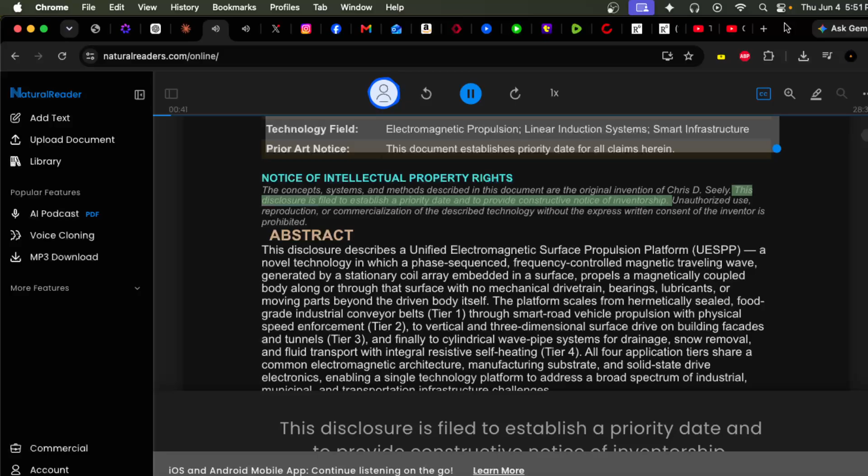Notice of intellectual property rights. The concepts, systems, and methods described in this document are the original invention of Chris D. Seely. This disclosure is filed to establish a priority date and to provide constructive notice of inventorship. Unauthorized use, reproduction, or commercialization of the described technology without the express written consent of the inventor is prohibited.

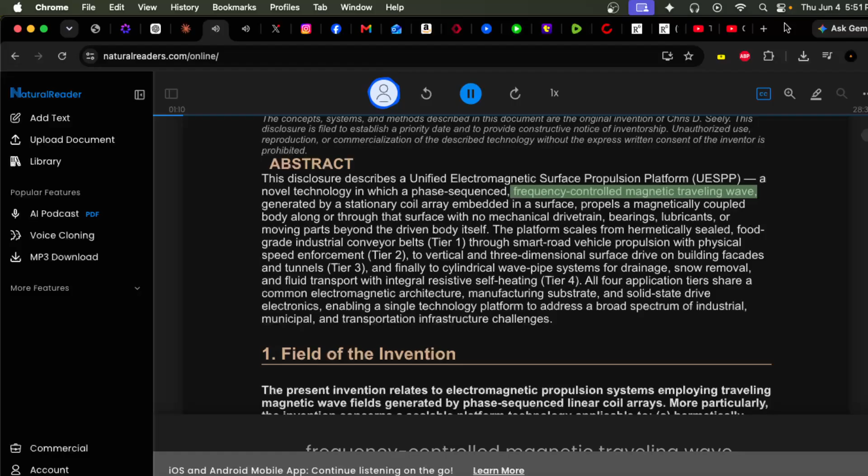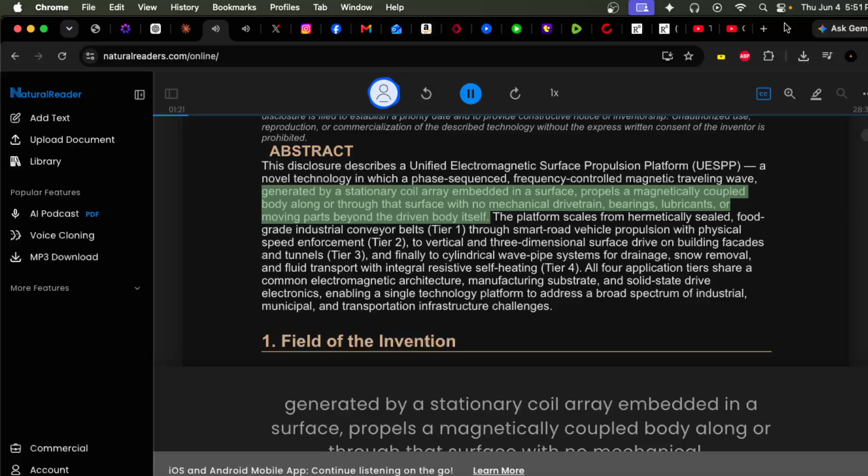Abstract. This disclosure describes a unified electromagnetic surface propulsion platform, a novel technology in which a phase-sequenced, frequency-controlled magnetic traveling wave, generated by a stationary coil array embedded in a surface, propels a magnetically coupled body along or through that surface with no mechanical drivetrain, bearings, lubricants, or moving parts beyond the driven body itself.

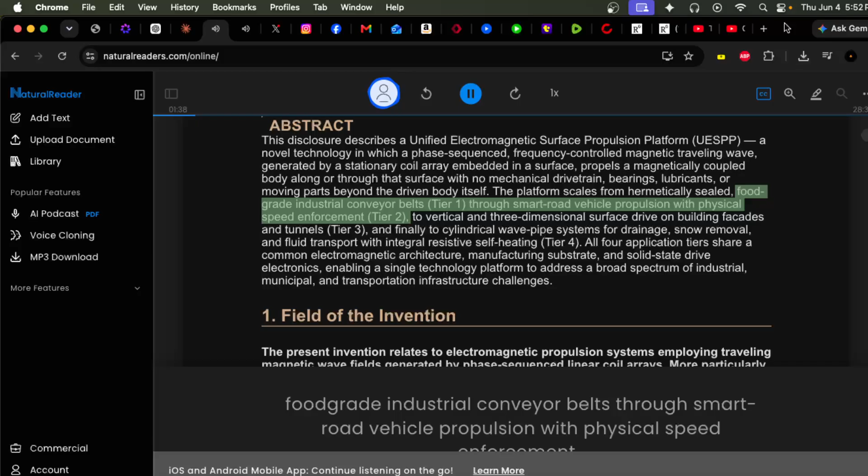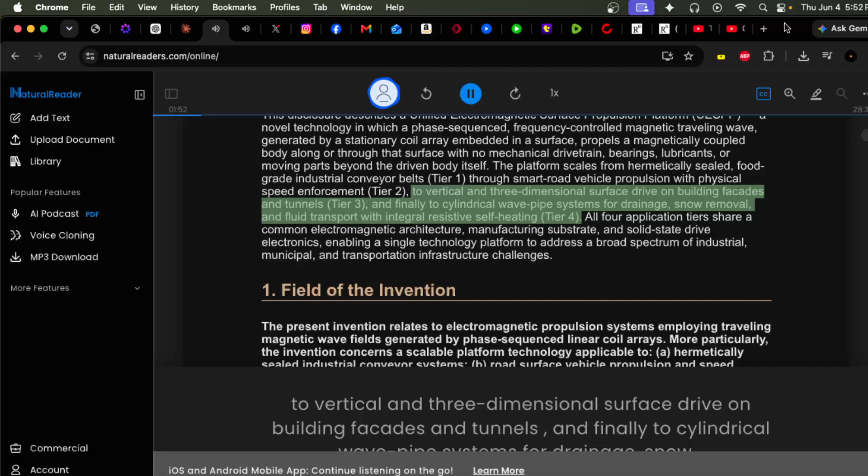The platform scales from hermetically sealed food-grade industrial conveyor belts through smart road vehicle propulsion with physical speed enforcement, to vertical and three-dimensional surface drive on building facades and tunnels, and finally to cylindrical wave pipe systems for drainage, snow removal, and fluid transport with integral resistive self-heating.

All four application tiers share a common electromagnetic architecture, manufacturing substrate, and solid-state drive electronics, enabling a single technology platform to address a broad spectrum of industrial, municipal, and transportation infrastructure challenges. Section 1: Field of the invention.

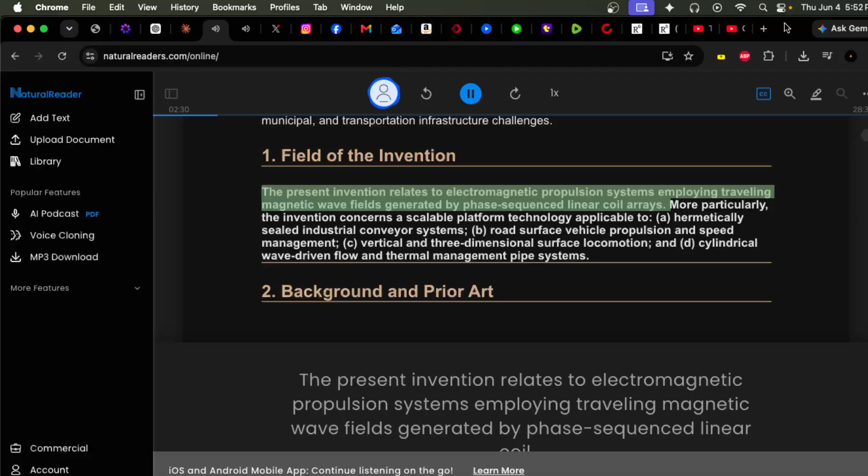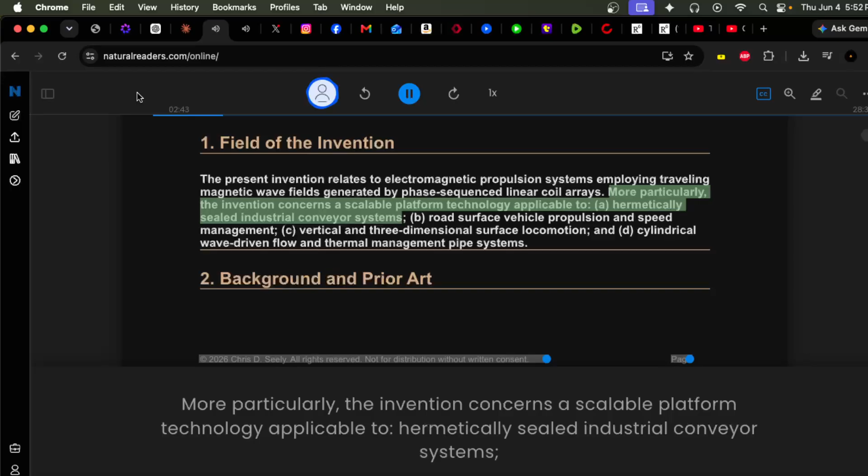The present invention relates to electromagnetic propulsion systems employing traveling magnetic wave fields generated by phase-sequenced linear coil arrays. More particularly, the invention concerns a scalable platform technology applicable to hermetically sealed industrial conveyor systems, road surface vehicle propulsion and speed management, vertical and three-dimensional surface locomotion, and cylindrical wave-driven flow and thermal management pipe systems.

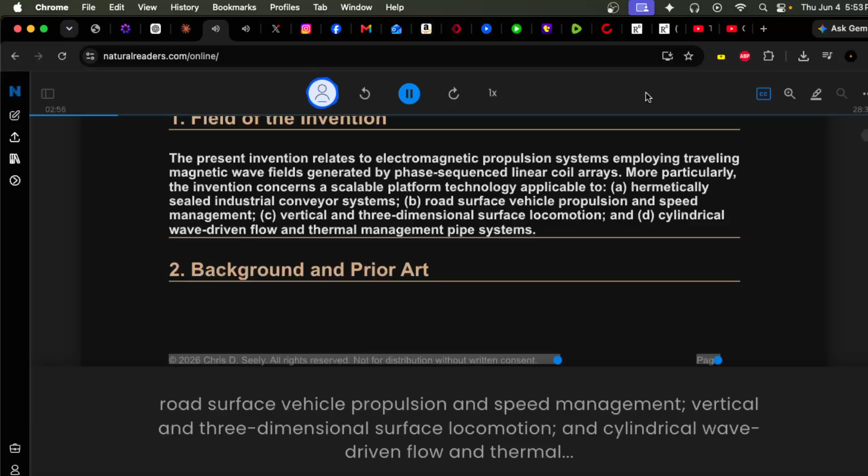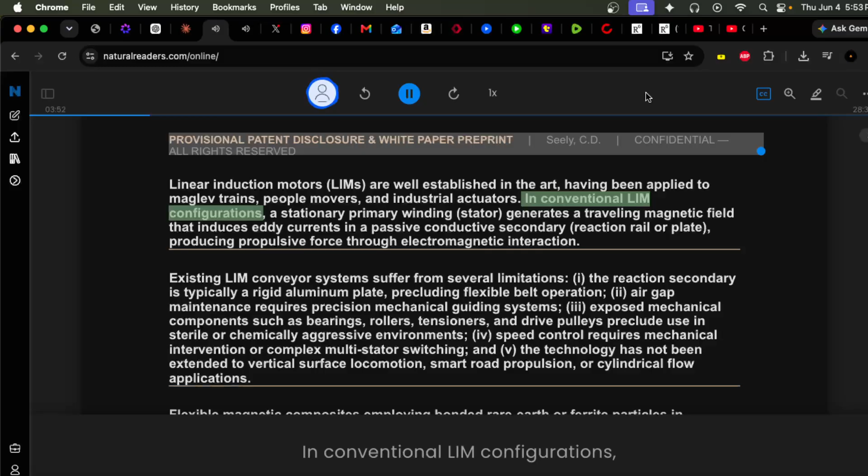Section 2: Background and prior art. Linear induction motors are well established in the art, having been applied to maglev trains, people movers, and industrial actuators. In conventional LIM configurations, a stationary primary winding generates a traveling magnetic field that induces eddy currents in a passive conductive secondary, producing propulsive force through electromagnetic interaction.

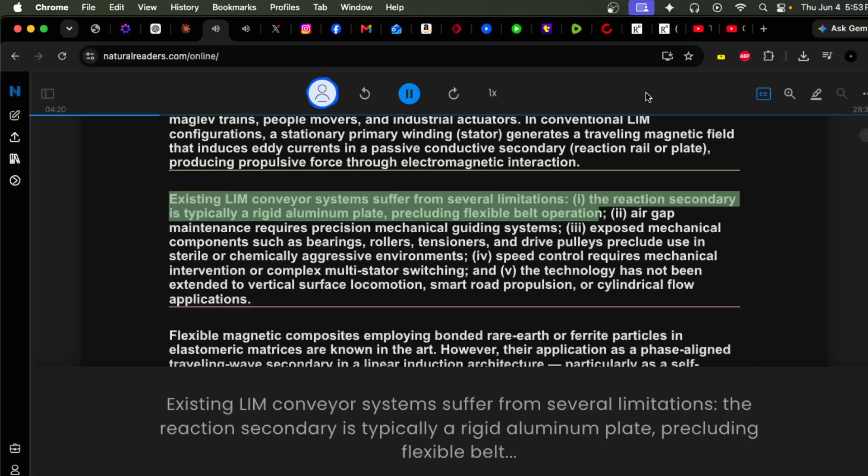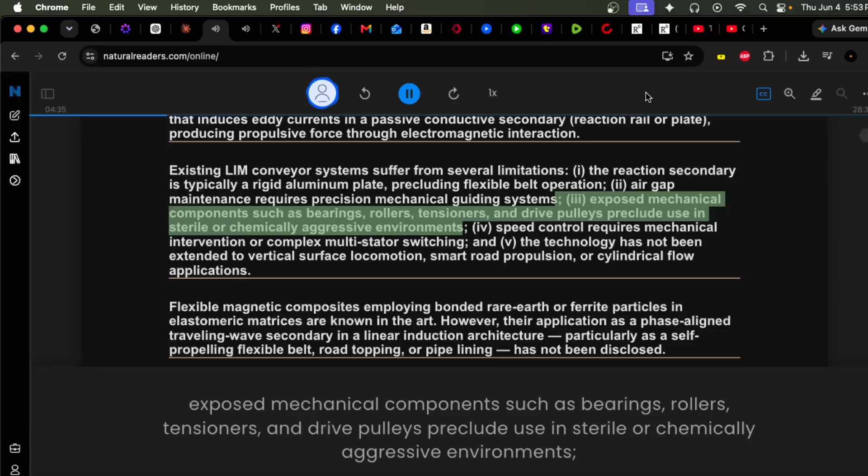Existing LIM conveyor systems suffer from several limitations. The reaction secondary is typically a rigid aluminum plate, precluding flexible belt operation. Air gap maintenance requires precision mechanical guiding systems. Exposed mechanical components such as bearings, rollers, tensioners, and drive pulleys preclude use in sterile or chemically aggressive environments.

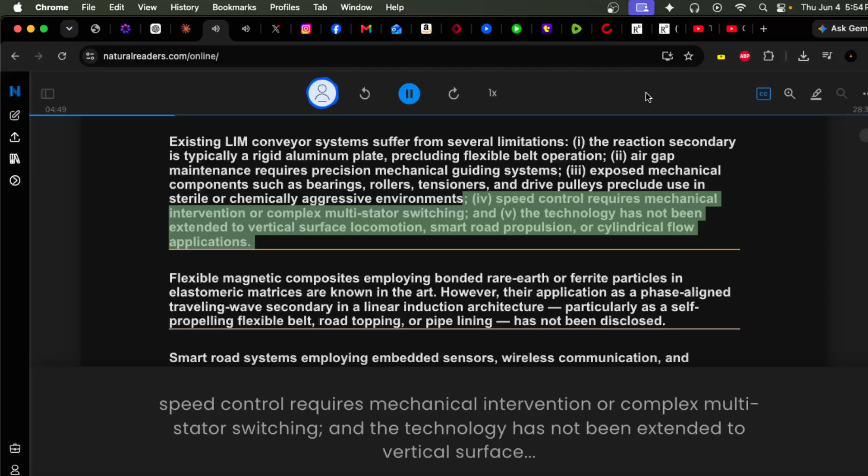Speed control requires mechanical intervention or complex multi-stator switching, and the technology has not been extended to vertical surface locomotion, smart road propulsion, or cylindrical flow applications.

Flexible magnetic composites employing bonded rare earth or ferrite particles in elastomeric matrices are known in the art. However, their application as a phase-aligned traveling wave secondary in a linear induction architecture, particularly as a self-propelling flexible belt, road topping, or pipe lining, has not been disclosed.

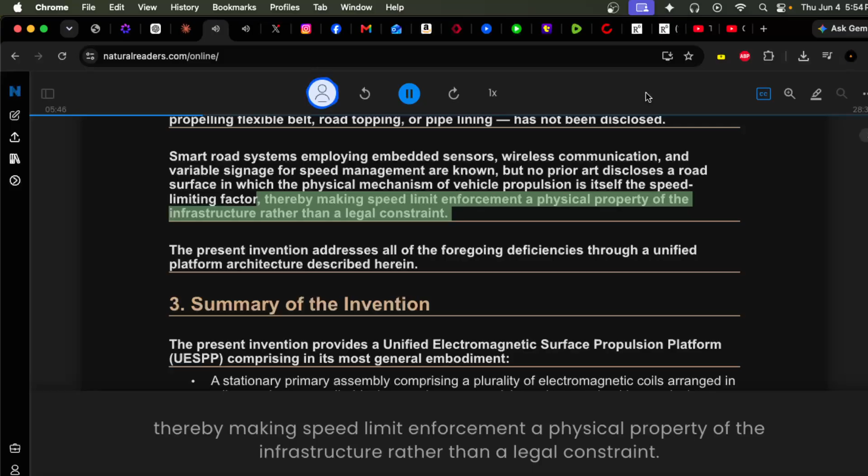Smart road systems employing embedded sensors, wireless communication, and variable signage for speed management are known. But no prior art discloses a road surface in which the physical mechanism of vehicle propulsion is itself the speed limiting factor, thereby making speed limit enforcement a physical property of the infrastructure rather than a legal constraint. The present invention addresses all of the foregoing deficiencies through a unified platform architecture described herein.

Section 3: Summary of the invention. The present invention provides a unified electromagnetic surface propulsion platform comprising, in its most general embodiment, a stationary primary assembly comprising a plurality of electromagnetic coils arranged in a linear, planar, or cylindrical array along a propulsion axis, energized by a polyphase alternating current source at a controlled frequency to generate a traveling magnetic wave field.

A magnetically coupled secondary comprising a flexible or rigid composite substrate incorporating a spatially periodic magnetic pole pattern aligned in phase with the primary coil array, and a solid-state variable frequency drive control system governing the frequency, phase sequence, and zonal energization of the primary coil array. The secondary is propelled along the primary assembly at a velocity determined by the traveling wave speed, which is the product of twice the pole pitch and the drive frequency.

Direction reversal is achieved by transposing any two of the three drive phases, requiring no mechanical intervention. Zone-by-zone independent control is achieved by segmenting the primary array into independently driven sections. The platform is realized in four principal application configurations as described in Section 5.

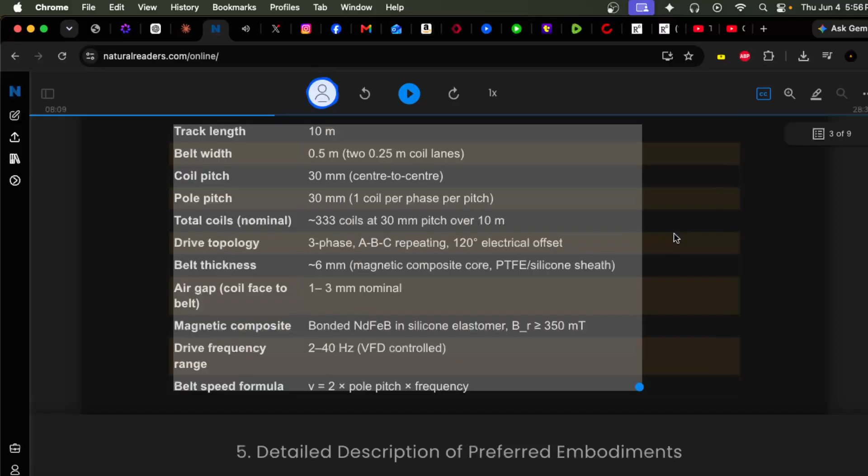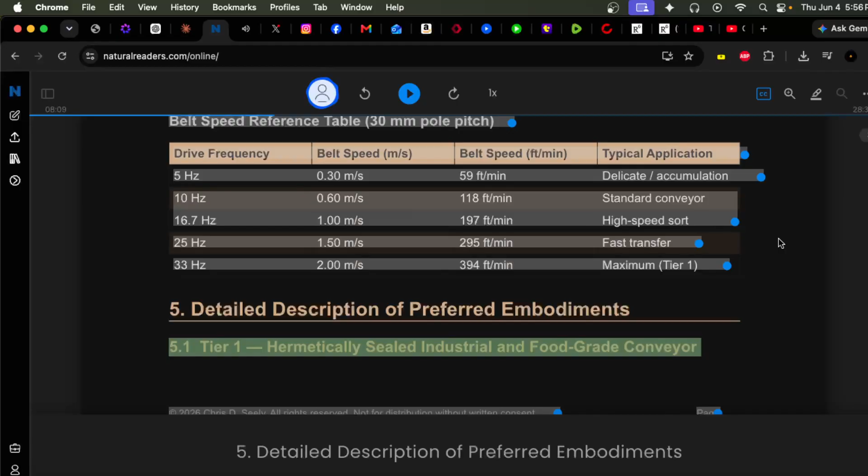Section 4: Reference design parameters. The following parameters define the baseline industrial conveyor embodiment from which all other tiers are scaled. Section 5: Detailed description of preferred embodiments.

5.1 Tier 1: Hermetically sealed industrial and food-grade conveyor. In the Tier 1 embodiment, the primary coil array is housed within a rigid, non-ferrous structural frame and fully encapsulated in a thermally conductive epoxy compound.

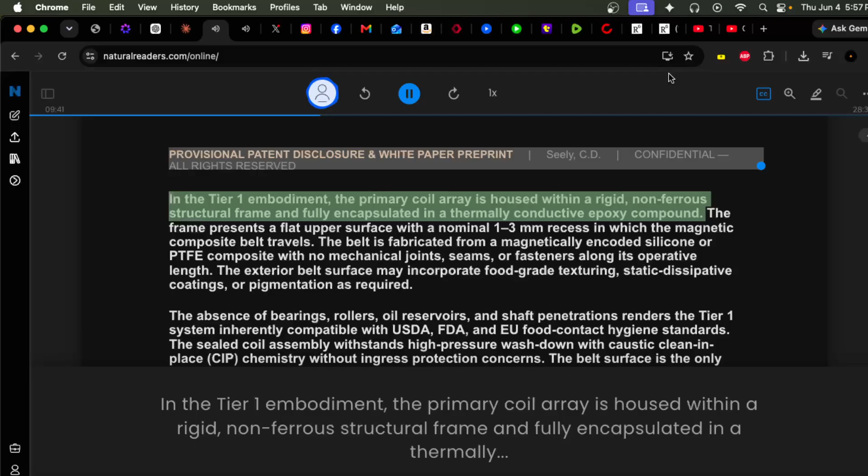The frame presents a flat upper surface with a nominal 1 to 3 mm recess in which the magnetic composite belt travels. The belt is fabricated from a magnetically encoded silicone or PTFE composite with no mechanical joints, seams, or fasteners along its operative length.

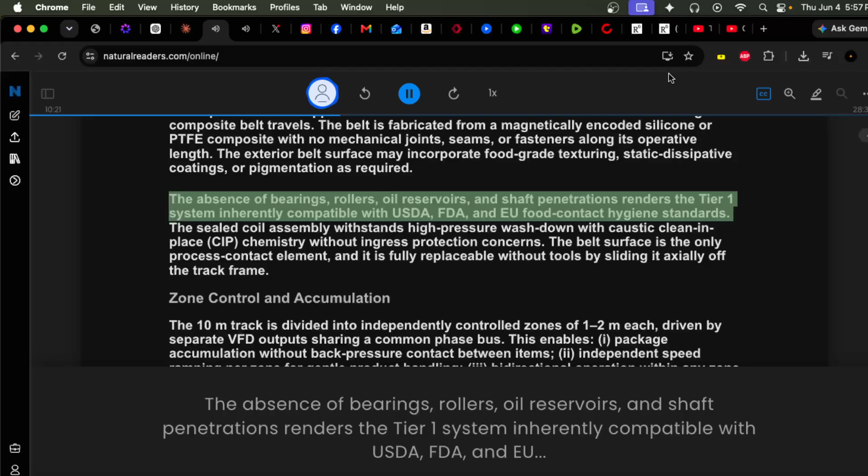The exterior belt surface may incorporate food-grade texturing, static dissipative coatings, or pigmentation as required. The absence of bearings, rollers, oil reservoirs, and shaft penetrations renders the Tier 1 system inherently compatible with USDA, FDA, and EU food contact hygiene standards.

The sealed coil assembly withstands high-pressure washdown with caustic clean-in-place chemistry without ingress protection concerns. The belt surface is the only process contact element, and it is fully replaceable without tools by sliding it axially off the track frame.

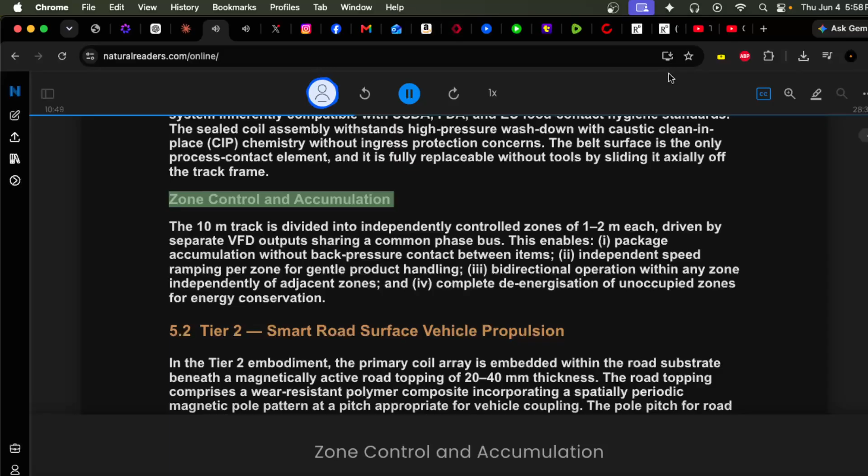Zone control and accumulation. The 10 meter track is divided into independently controlled zones of 1 to 2 meters each, driven by separate VFD outputs sharing a common phase bus.

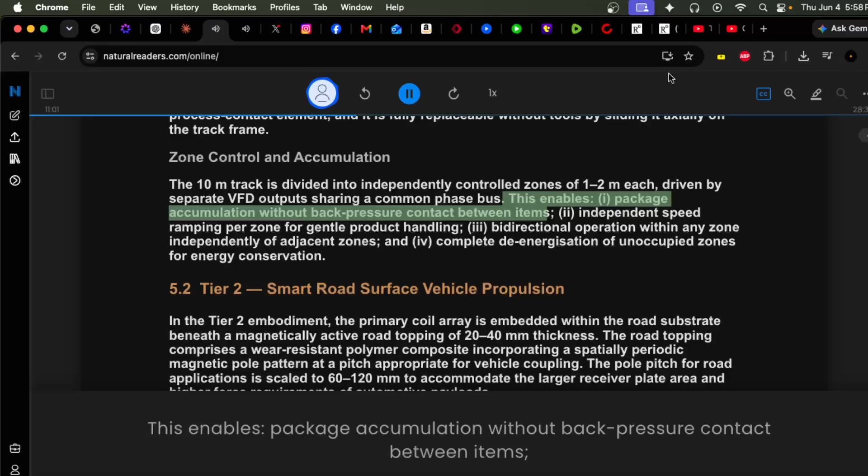This enables package accumulation without back pressure contact between items, independent speed ramping per zone for gentle product handling, bidirectional operation within any zone independently of adjacent zones, and complete de-energization of unoccupied zones for energy conservation.

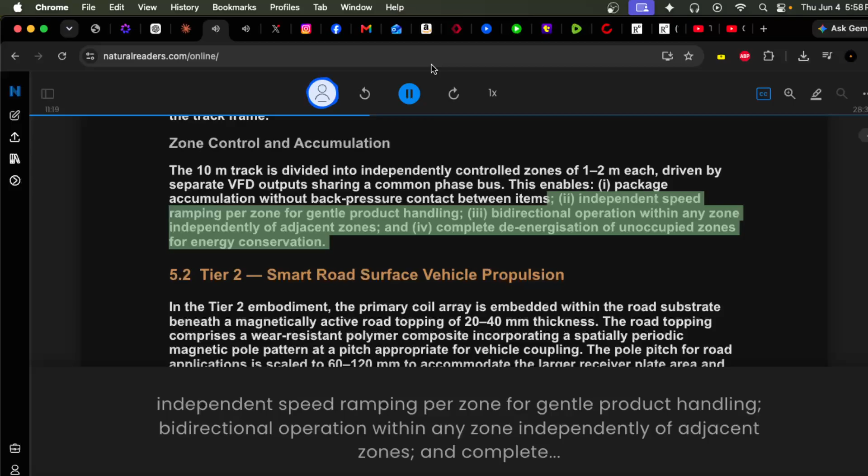5.2 Tier 2 Smart Road Surface Vehicle Propulsion.

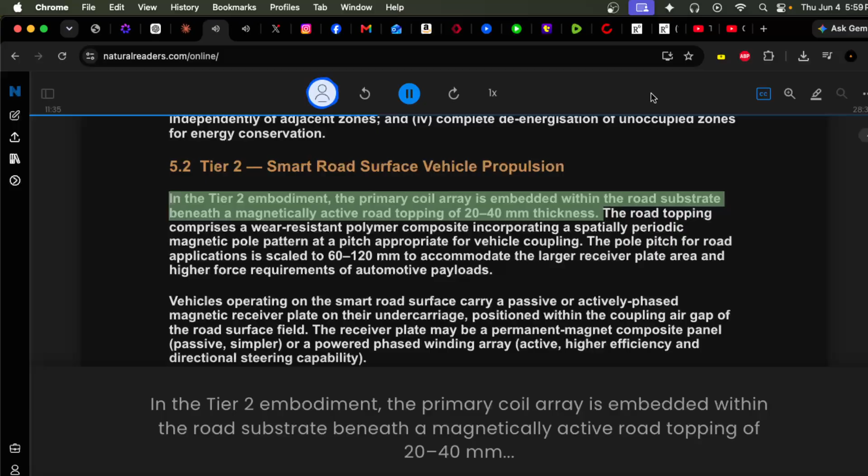In the Tier 2 embodiment, the primary coil array is embedded within the road substrate beneath a magnetically active road topping of 20 to 40 mm thickness. The road topping comprises a wear-resistant polymer composite incorporating a spatially periodic magnetic pole pattern at a pitch appropriate for vehicle coupling. The pole pitch for road applications is scaled to 60 to 120 mm to accommodate the larger receiver plate area and higher force requirements of automotive payloads.

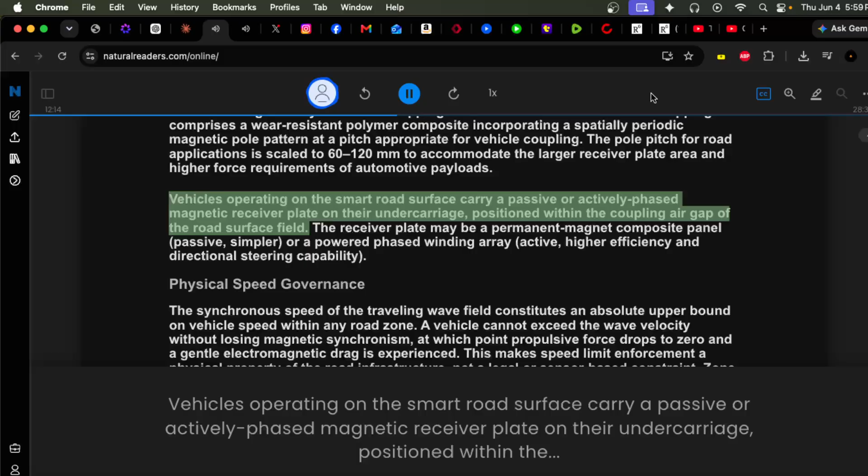Vehicles operating on the smart road surface carry a passive or actively phased magnetic receiver plate on their undercarriage, positioned within the coupling air gap of the road surface field. The receiver plate may be a permanent magnet composite panel or a powered phased winding array.

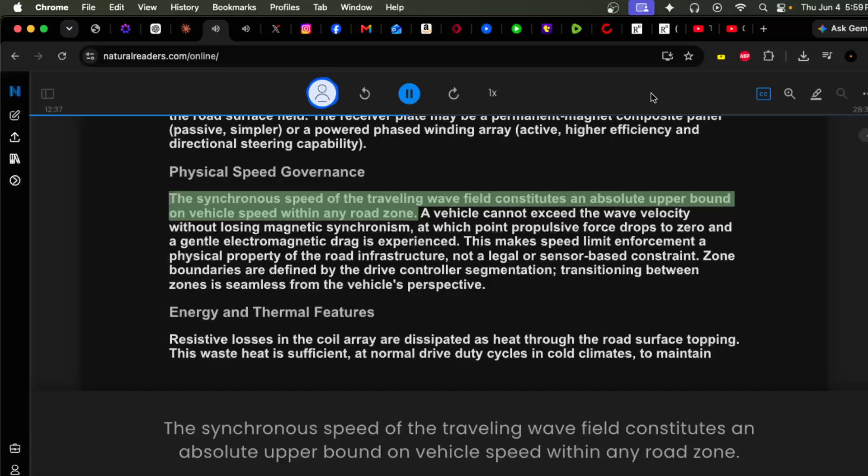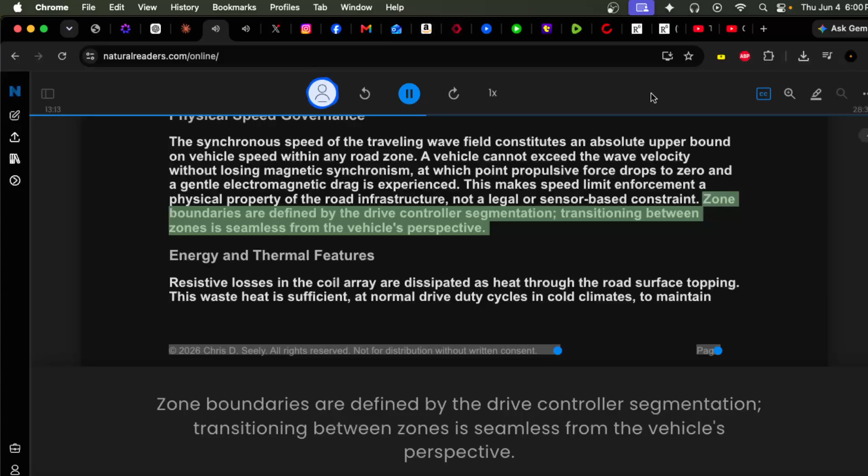Physical speed governance. The synchronous speed of the traveling wave field constitutes an absolute upper bound on vehicle speed within any road zone. A vehicle cannot exceed the wave velocity without losing magnetic synchronism, at which point propulsive force drops to zero and a gentle electromagnetic drag is experienced. This makes speed limit enforcement a physical property of the road infrastructure, not a legal or sensor-based constraint. Zone boundaries are defined by the drive controller segmentation. Transitioning between zones is seamless from the vehicle's perspective.

Energy and thermal features. Resistive losses in the coil array are dissipated as heat through the road surface topping. This waste heat is sufficient, at normal drive duty cycles in cold climates, to maintain surface temperature above 0 degrees Celsius, preventing ice and snow accumulation without dedicated heating infrastructure.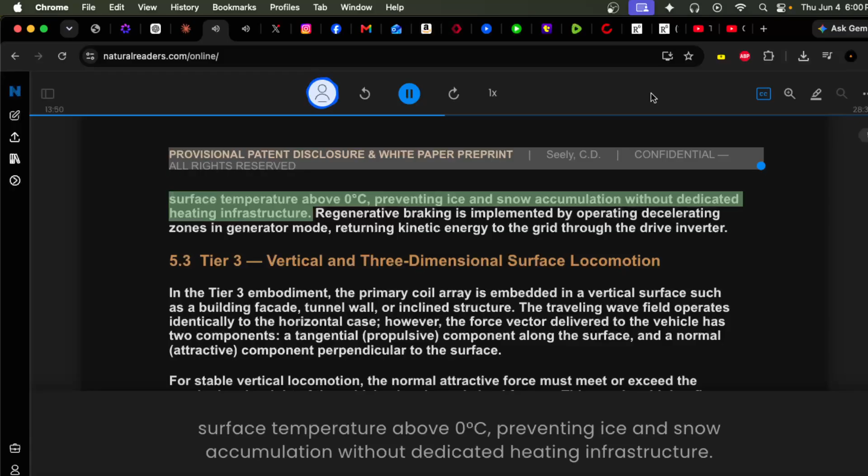Regenerative braking is implemented by operating decelerating zones in generator mode, returning kinetic energy to the grid through the drive inverter.

5.3 Tier 3 – Vertical and three-dimensional surface locomotion. In the Tier 3 embodiment, the primary coil array is embedded in a vertical surface such as a building facade, tunnel wall, or inclined structure.

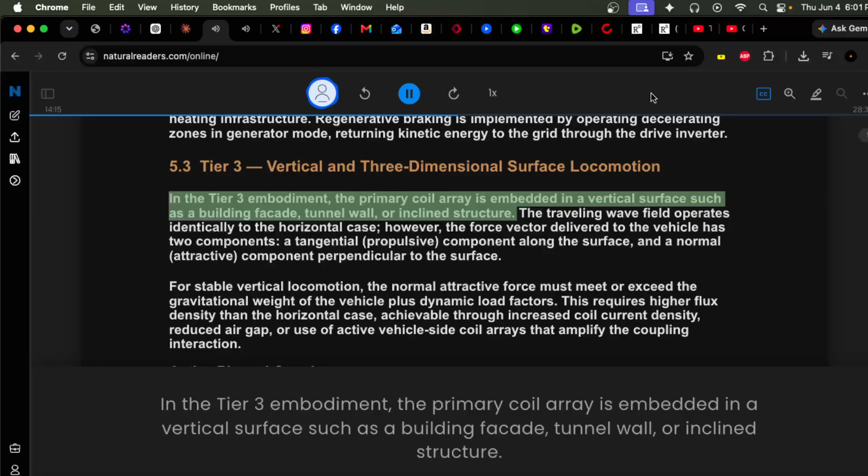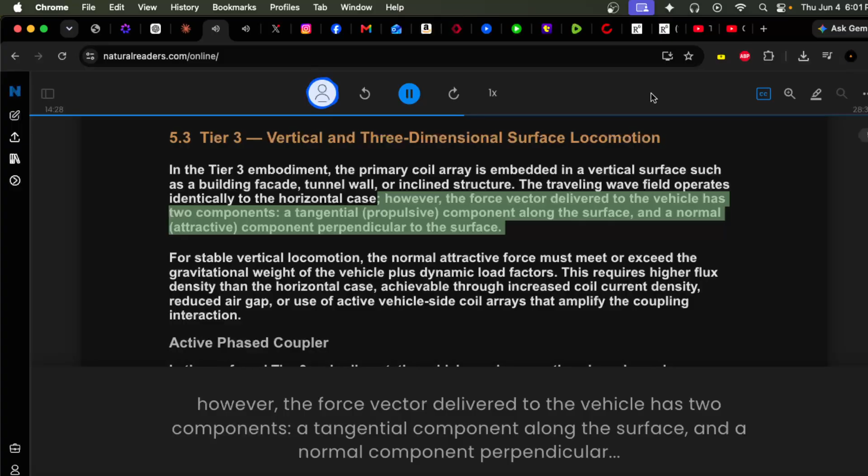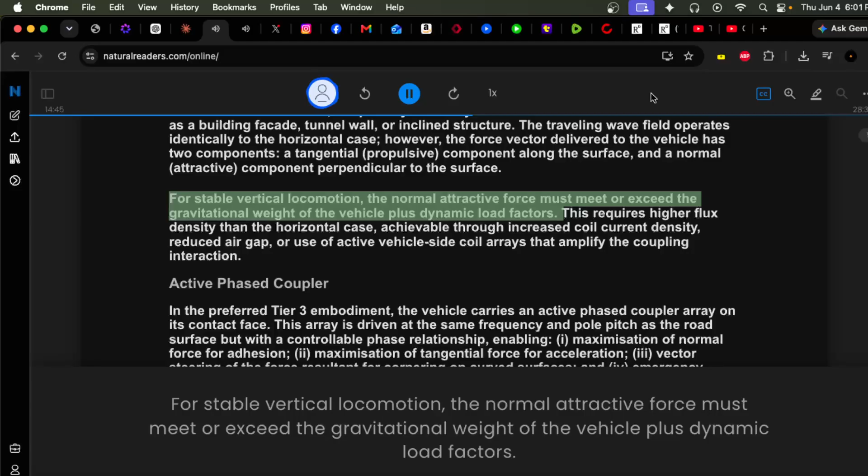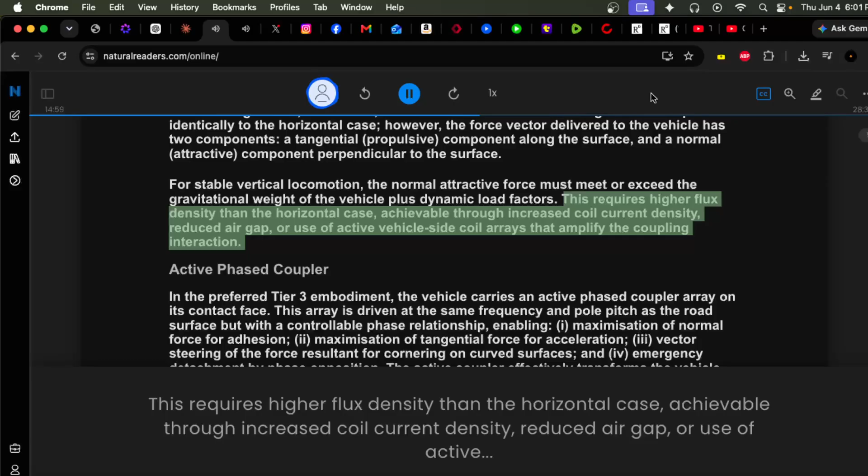The traveling wave field operates identically to the horizontal case. However, the force vector delivered to the vehicle has two components: a tangential component along the surface, and a normal component perpendicular to the surface. For stable vertical locomotion, the normal attractive force must meet or exceed the gravitational weight of the vehicle plus dynamic load factors. This requires higher flux density than the horizontal case, achievable through increased coil current density, reduced air gap, or use of active vehicle side coil arrays that amplify the coupling interaction.

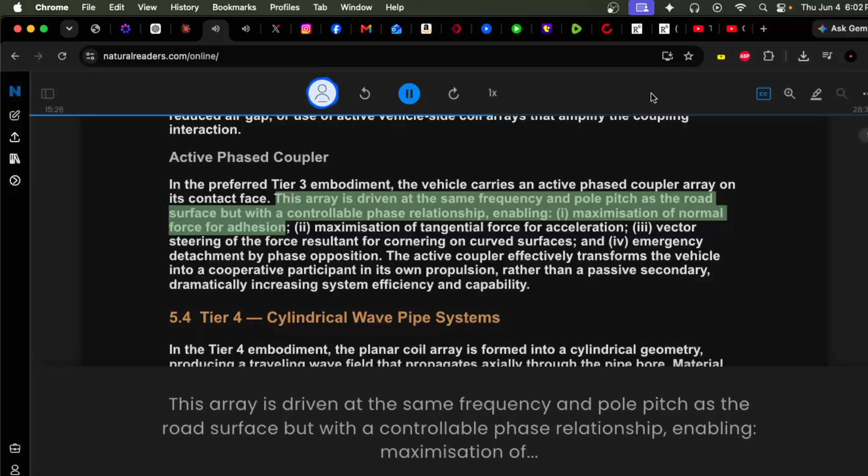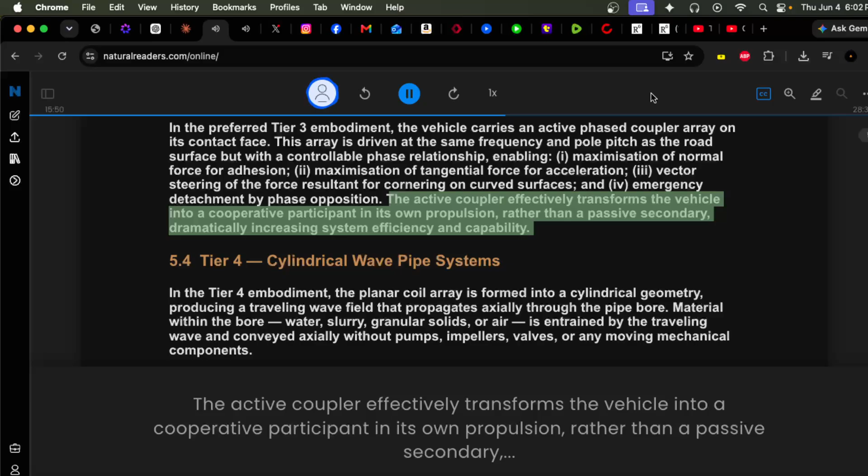Active phased coupler. In the preferred Tier 3 embodiment, the vehicle carries an active phased coupler array on its contact face. This array is driven at the same frequency and pole pitch as the road surface but with a controllable phase relationship, enabling maximization of normal force for adhesion, maximization of tangential force for acceleration, vector steering of the force resultant for cornering on curved surfaces, and emergency detachment by phase opposition. The active coupler effectively transforms the vehicle into a cooperative participant in its own propulsion, rather than a passive secondary, dramatically increasing system efficiency and capability.

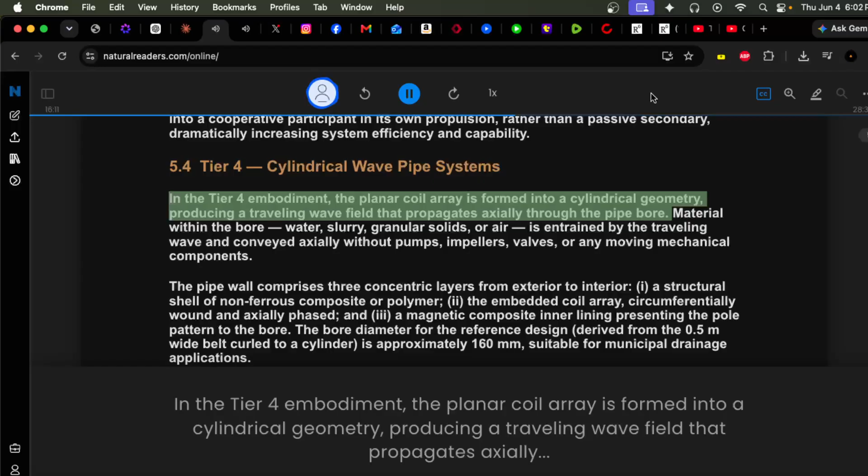5.4 Tier 4 – Cylindrical wavepipe systems. In the Tier 4 embodiment, the planar coil array is formed into a cylindrical geometry, producing a traveling wave field that propagates axially through the pipe bore. Material within the bore—water, slurry, granular solids, or air—is entrained by the traveling wave and conveyed axially without pumps, impellers, valves, or any moving mechanical components.

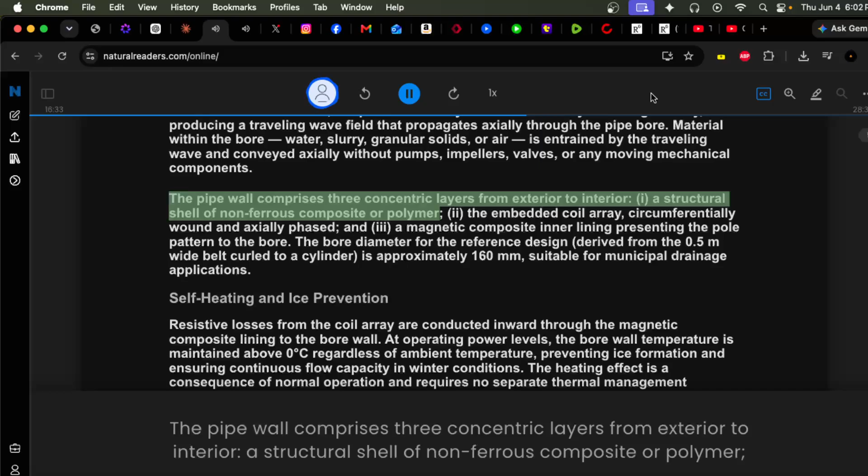The pipe wall comprises three concentric layers from exterior to interior: a structural shell of non-ferrous composite or polymer, the embedded coil array, circumferentially wound and axially phased, and a magnetic composite inner lining presenting the pole pattern to the bore. The bore diameter for the reference design is approximately 160 mm, suitable for municipal drainage applications.

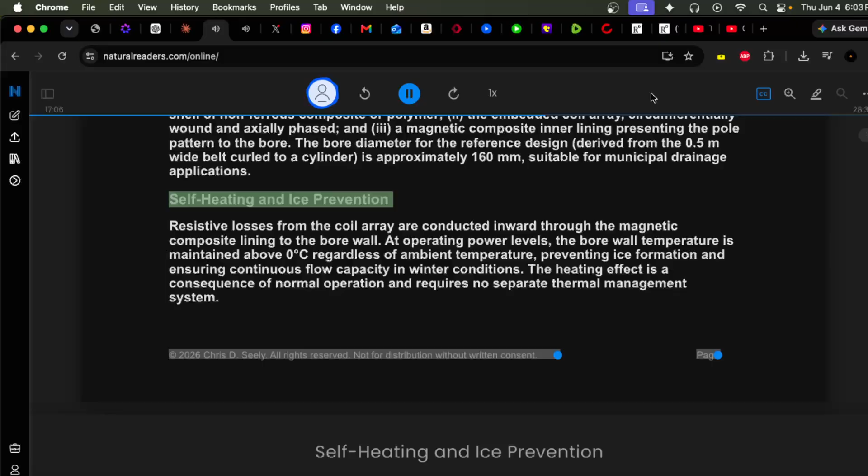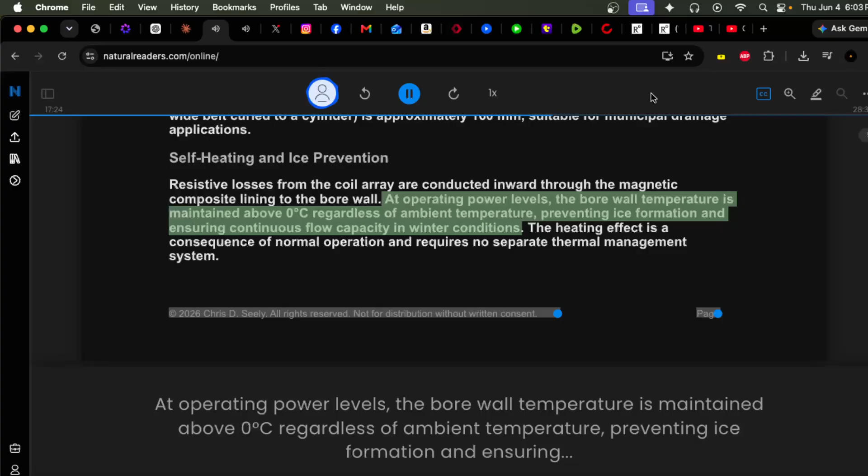Self-heating and ice prevention. Resistive losses from the coil array are conducted inward through the magnetic composite lining to the bore wall. At operating power levels, the bore wall temperature is maintained above 0 degrees Celsius regardless of ambient temperature, preventing ice formation and ensuring continuous flow capacity in winter conditions. The heating effect is a consequence of normal operation and requires no separate thermal management system.

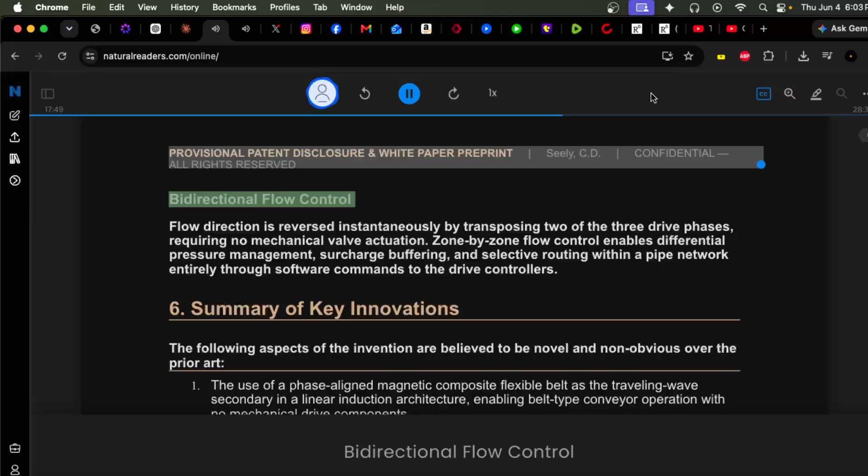Bidirectional flow control. Flow direction is reversed instantaneously by transposing two of the three drive phases, requiring no mechanical valve actuation. Zone-by-zone flow control enables differential pressure management, surcharge buffering, and selective routing within a pipe network entirely through software commands to the drive controllers.

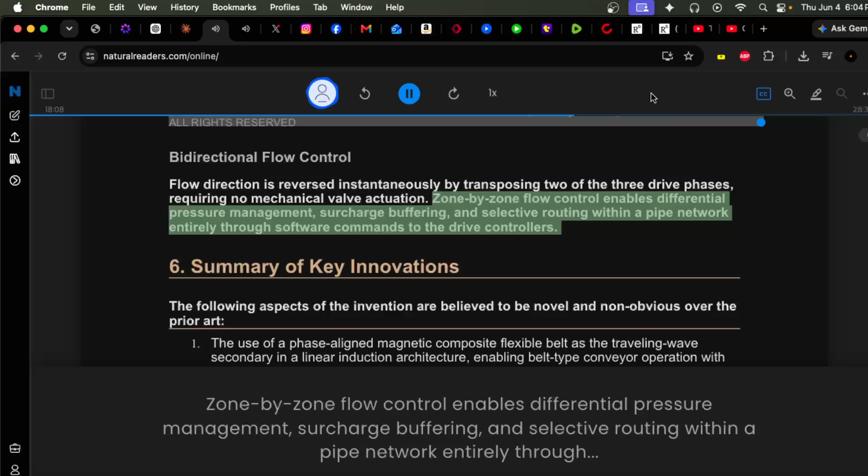6. Summary of key innovations. The following aspects of the invention are believed to be novel and non-obvious over the prior art. 1. The use of a phase-aligned magnetic composite flexible belt as the traveling wave secondary in a linear induction architecture, enabling belt-type conveyor operation with no mechanical drive components.

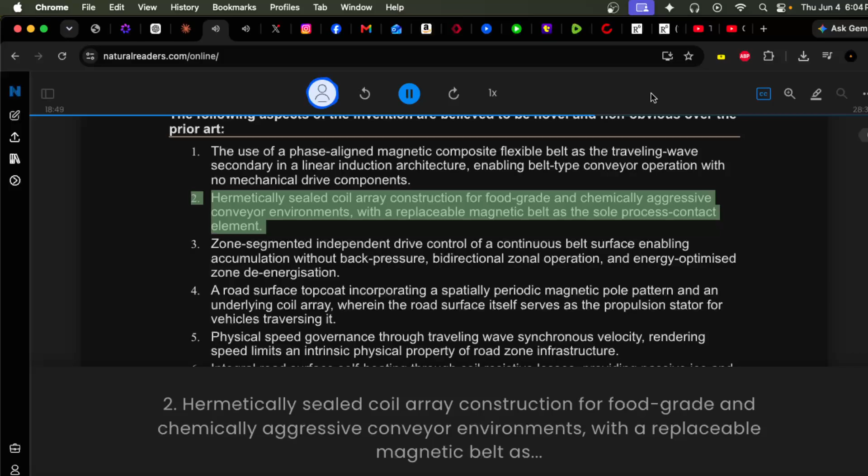2. Hermetically sealed coil array construction for food-grade and chemically aggressive conveyor environments, with a replaceable magnetic belt as the sole process contact element. 3. Zone-segmented independent drive control of a continuous belt surface enabling accumulation without back pressure, bidirectional zonal operation, and energy-optimized zone de-energization.

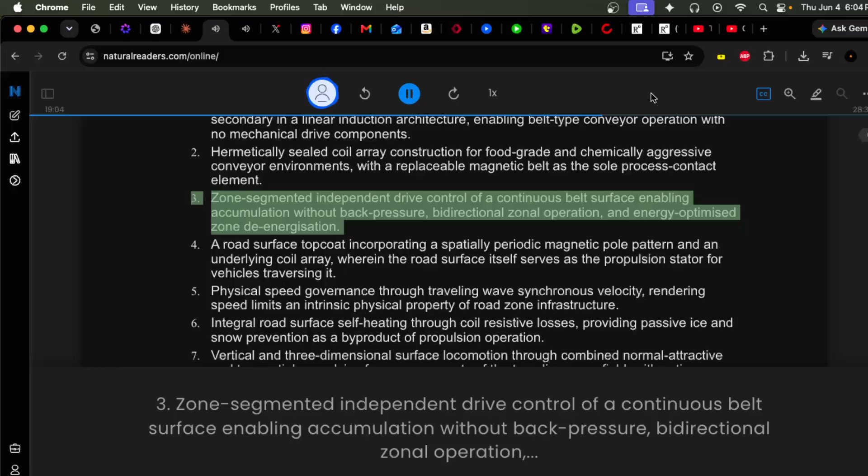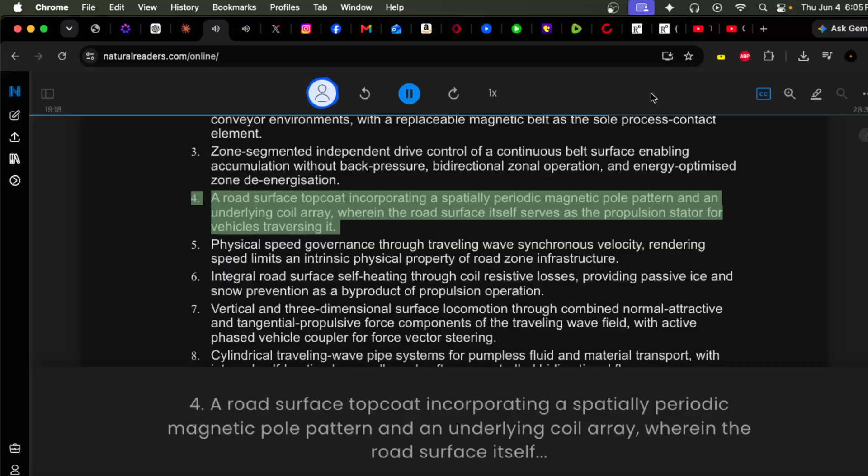4. A road surface topcoat incorporating a spatially periodic magnetic pole pattern and an underlying coil array, wherein the road surface itself serves as the propulsion stator for vehicles traversing it. 5. Physical speed governance through traveling wave synchronous velocity, rendering speed limits an intrinsic physical property of road zone infrastructure.

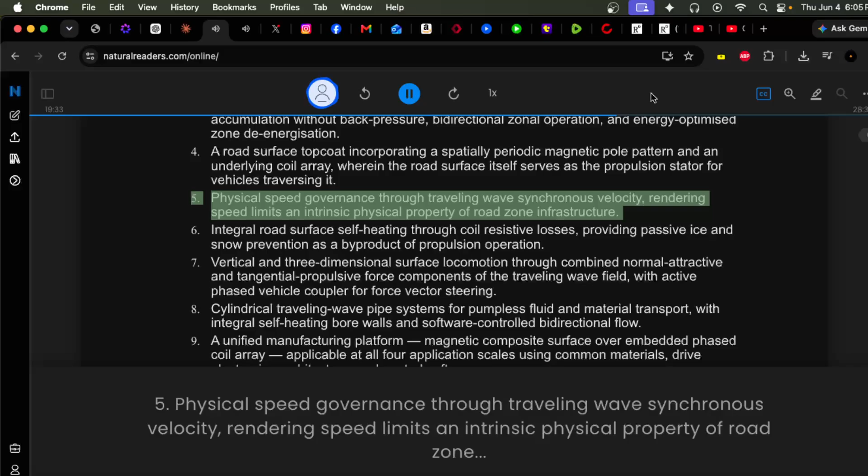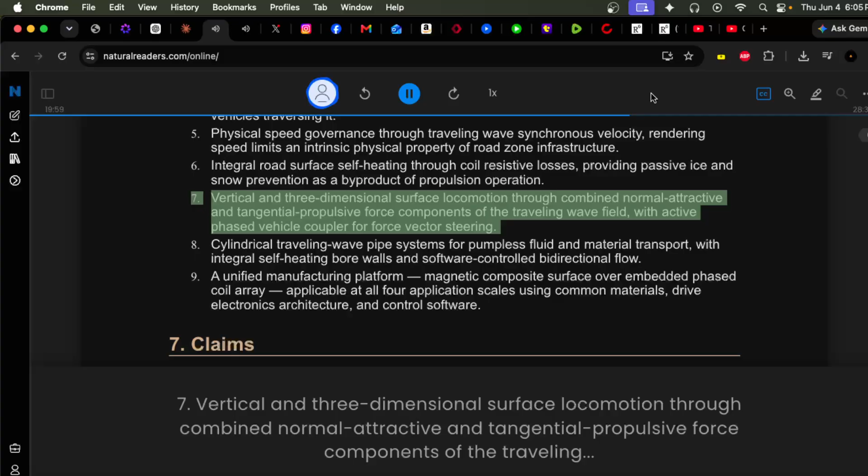6. Integral road surface self-heating through coil-resistive losses, providing passive ice and snow prevention as a byproduct of propulsion operation. 7. Vertical and three-dimensional surface locomotion through combined normal attractive and tangential propulsive force components of the traveling wave field, with active phased vehicle coupler for force vector steering.

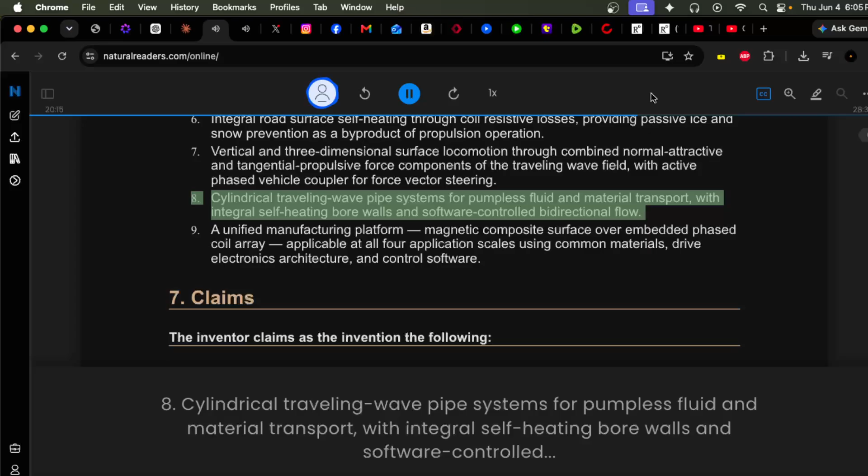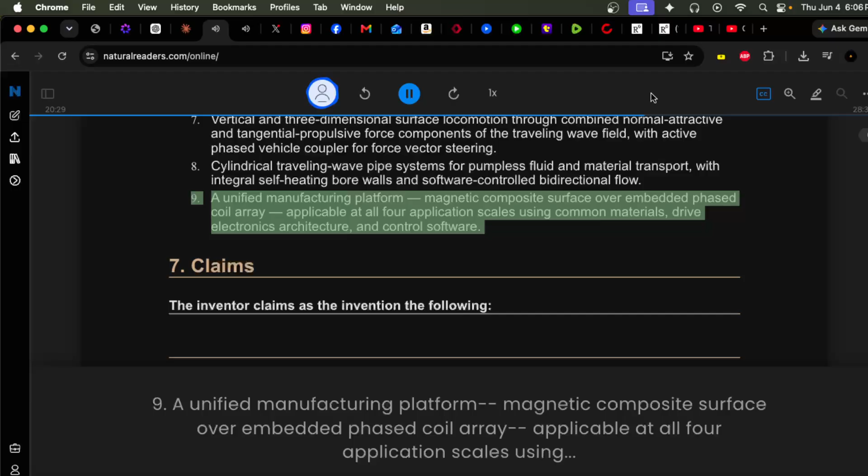8. Cylindrical traveling wave pipe systems for pumpless fluid and material transport, with integral self-heating bore walls and software-controlled bidirectional flow. 9. A unified manufacturing platform, magnetic composite surface over embedded phased coil array, applicable at all 4 application scales using common materials, drive electronics architecture, and control software.

7. Claims. The inventor claims as the invention the following. 1. A propulsion system comprising a primary assembly including a plurality of electromagnetic coils arranged along a propulsion axis and energized by a polyphase alternating current at a controlled frequency to produce a traveling magnetic wave field.

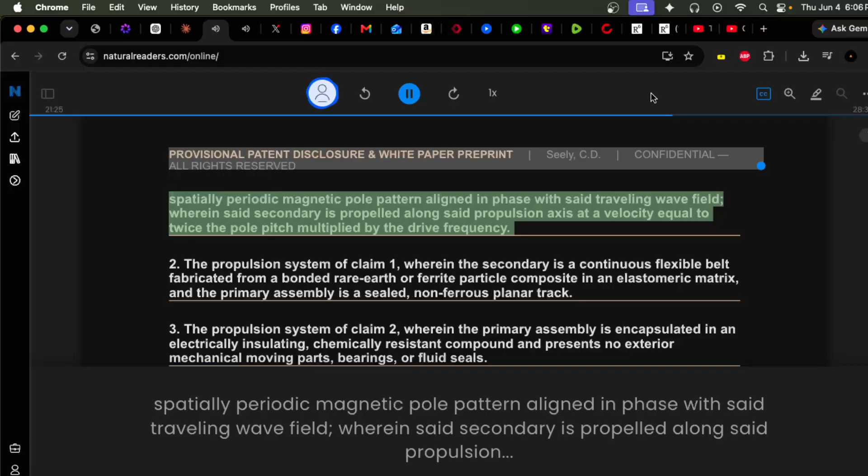And a secondary comprising a flexible or rigid magnetic composite body incorporating a spatially periodic magnetic pole pattern aligned in phase with said traveling wave field, wherein said secondary is propelled along said propulsion axis at a velocity equal to twice the pole pitch multiplied by the drive frequency.

2. The propulsion system of Claim 1, wherein the secondary is a continuous flexible belt fabricated from a bonded rare earth or ferrite particle composite in an elastomeric matrix, and the primary assembly is a sealed, non-ferrous planar track.

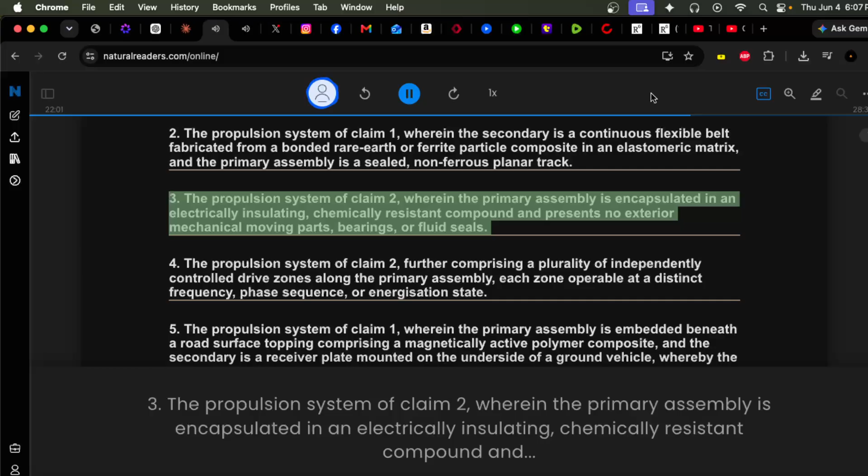3. The propulsion system of Claim 2, wherein the primary assembly is encapsulated in an electrically insulating, chemically resistant compound and presents no exterior mechanical moving parts, bearings, or fluid seals.

4. The propulsion system of Claim 2, further comprising a plurality of independently controlled drive zones along the primary assembly, each zone operable at a distinct frequency, phase sequence, or energization state.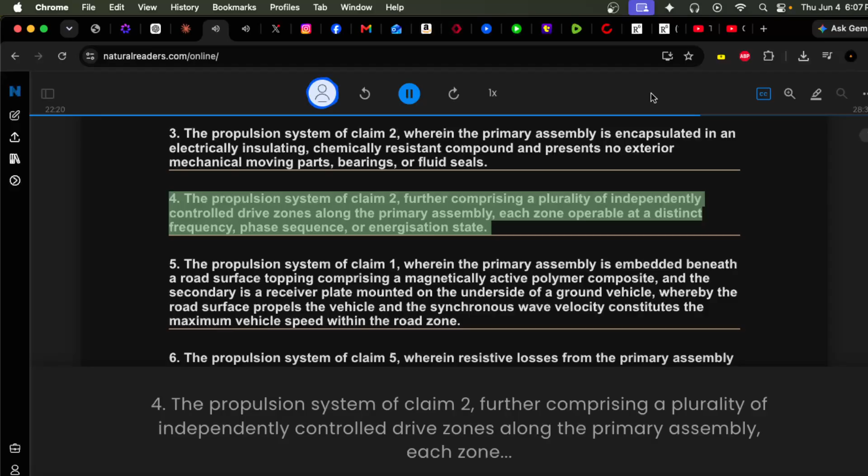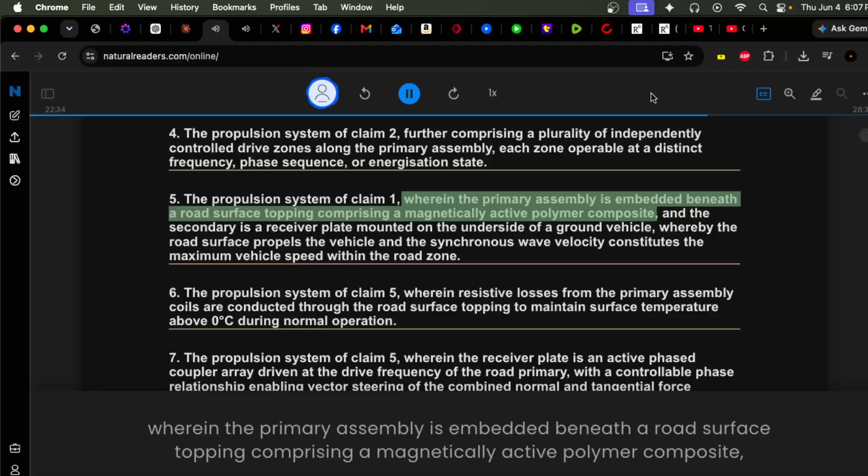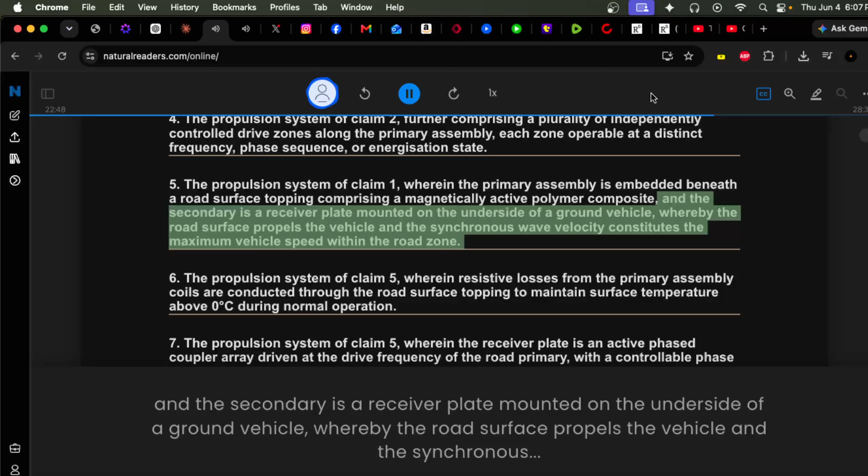5. The propulsion system of Claim 1, wherein the primary assembly is embedded beneath a road surface topping comprising a magnetically active polymer composite, and the secondary is a receiver plate mounted on the underside of a ground vehicle, whereby the road surface propels the vehicle and the synchronous wave velocity constitutes the maximum vehicle speed within the road zone.

6. The propulsion system of Claim 5, wherein resistive losses from the primary assembly coils are conducted through the road surface topping to maintain surface temperature above 0 degrees Celsius during normal operation.

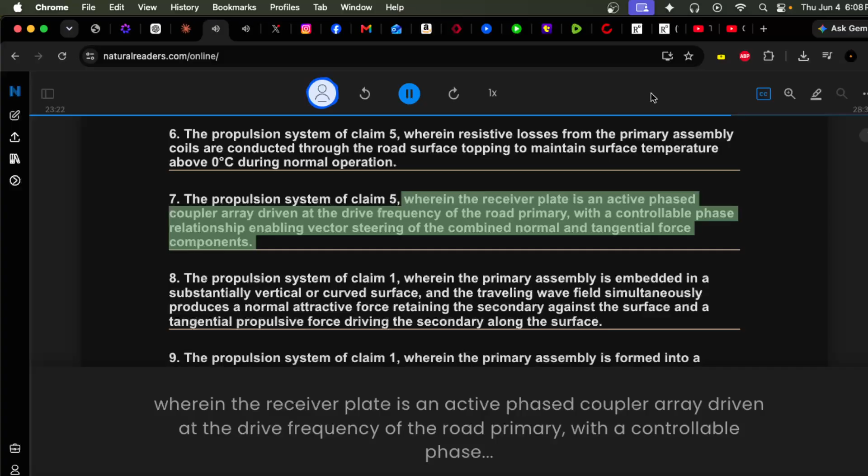7. The propulsion system of Claim 5, wherein the receiver plate is an active phased coupler array driven at the drive frequency of the road primary, with a controllable phase relationship enabling vector steering of the combined normal and tangential force components. 8. The propulsion system of Claim 1, wherein the primary assembly is embedded in a substantially vertical or curved surface,

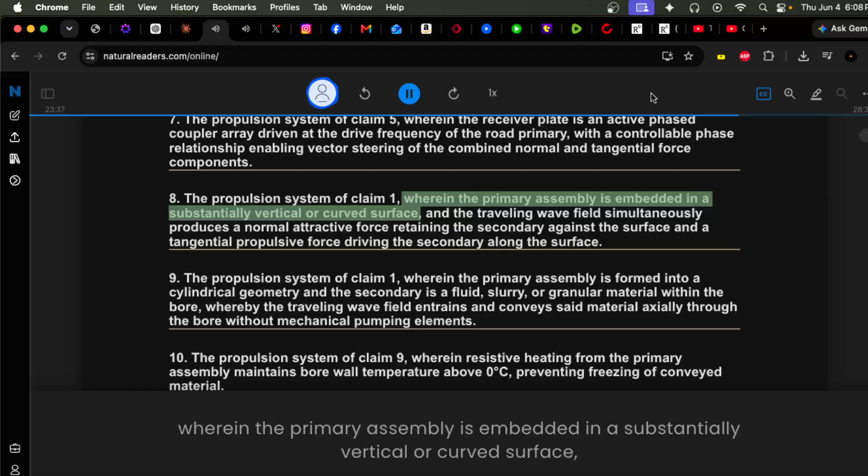and the traveling wave field simultaneously produces a normal attractive force retaining the secondary against the surface and a tangential propulsive force driving the secondary along the surface.

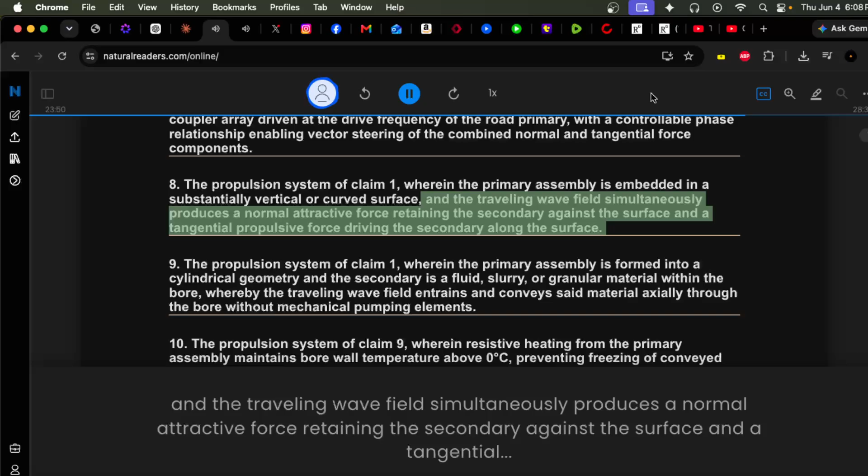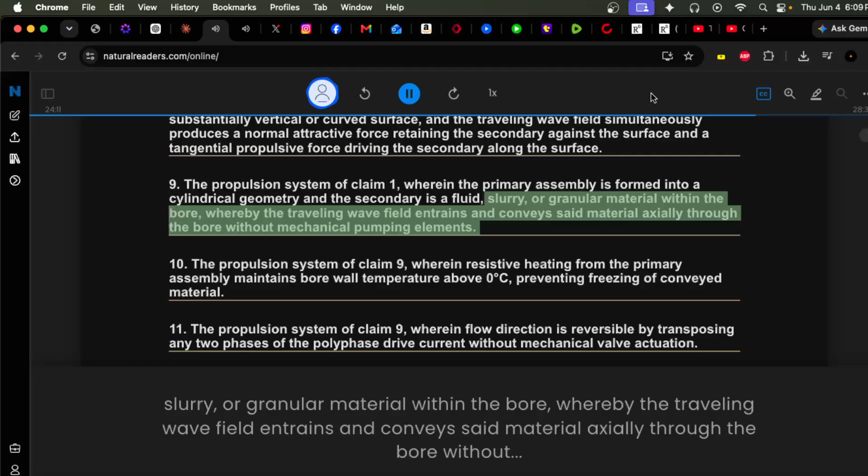9. The propulsion system of Claim 1, wherein the primary assembly is formed into a cylindrical geometry and the secondary is a fluid, slurry, or granular material within the bore, whereby the traveling wave field entrains and conveys said material axially through the bore without mechanical pumping elements.

10. The propulsion system of Claim 9, wherein resistive heating from the primary assembly maintains bore wall temperature above 0 degrees Celsius, preventing freezing of conveyed material.

11. The propulsion system of Claim 9, wherein flow direction is reversible by transposing any 2 phases of the polyphase drive current without mechanical valve actuation.

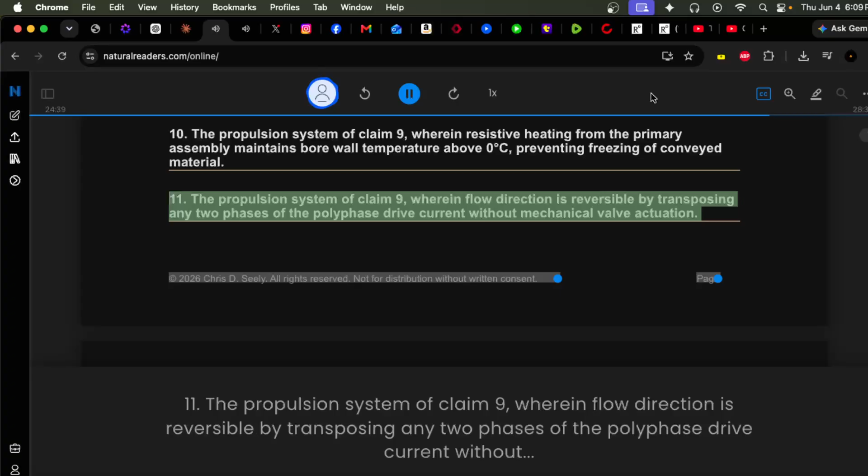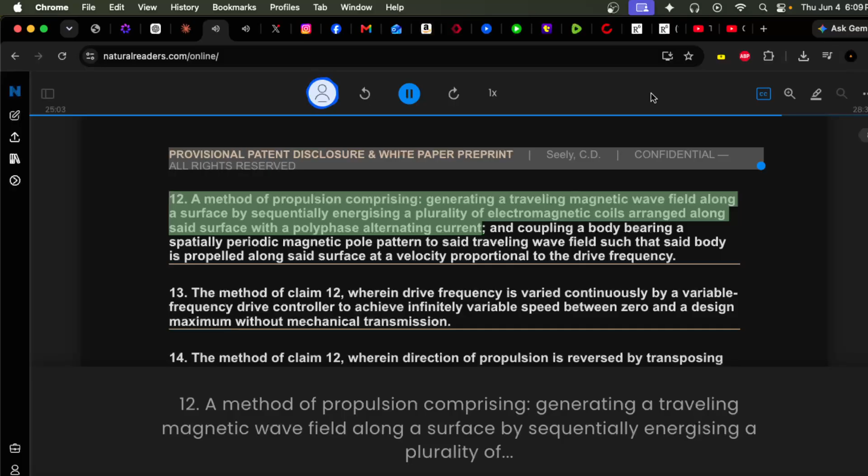12. A method of propulsion comprising generating a traveling magnetic wave field along a surface by sequentially energizing a plurality of electromagnetic coils arranged along said surface with a polyphase alternating current, and coupling a body bearing a spatially periodic magnetic pole pattern to said traveling wave field such that said body is propelled along said surface at a velocity proportional to the drive frequency.

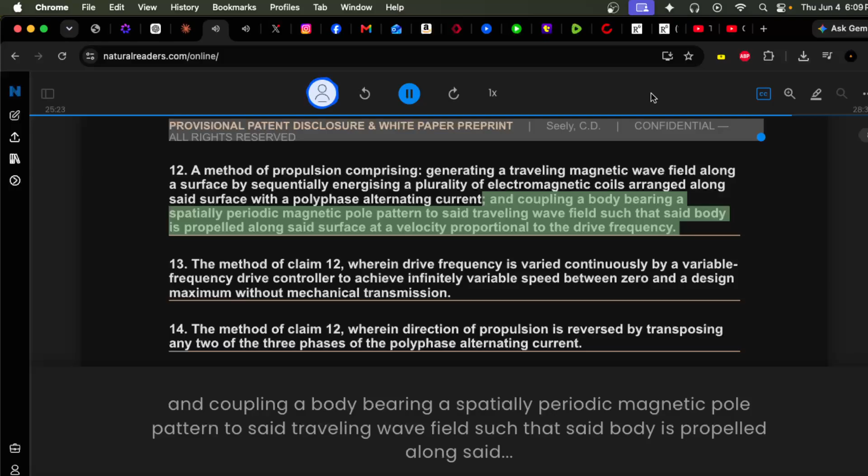13. The method of Claim 12, wherein drive frequency is varied continuously by a variable frequency drive controller to achieve infinitely variable speed between 0 and a design maximum without mechanical transmission.

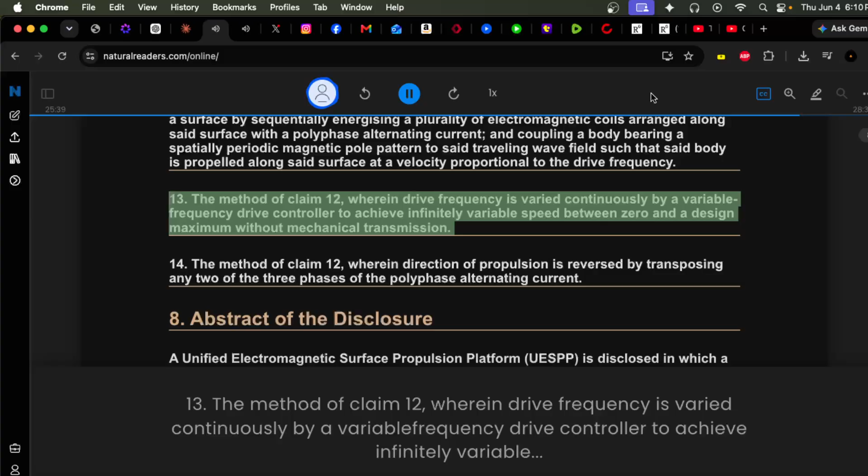14. The method of Claim 12, wherein direction of propulsion is reversed by transposing any 2 of the 3 phases of the polyphase alternating current.

8. Abstract of the disclosure. A unified electromagnetic surface propulsion platform is disclosed in which a traveling magnetic wave, generated by a phase-sequenced coil array embedded in a surface, propels a magnetically coupled secondary body along or through that surface.

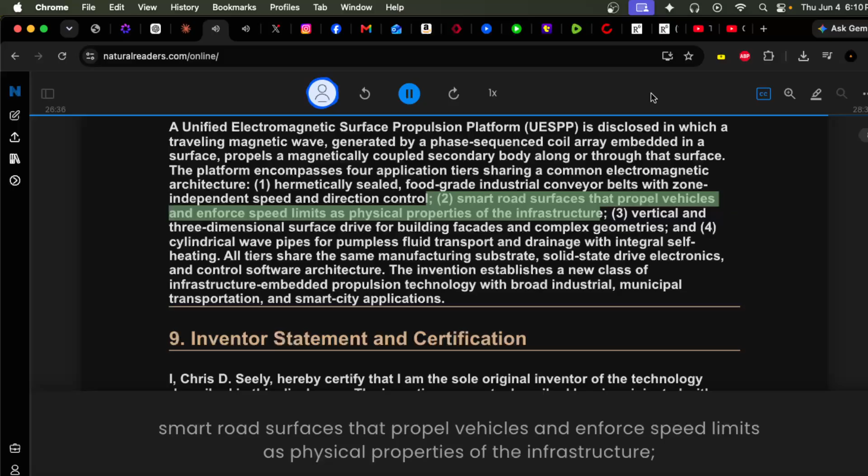The platform encompasses 4 application tiers sharing a common electromagnetic architecture: hermetically sealed, food-grade industrial conveyor belts with zone-independent speed and direction control, and smart road surfaces that propel vehicles and enforce speed limits as physical properties of the infrastructure.

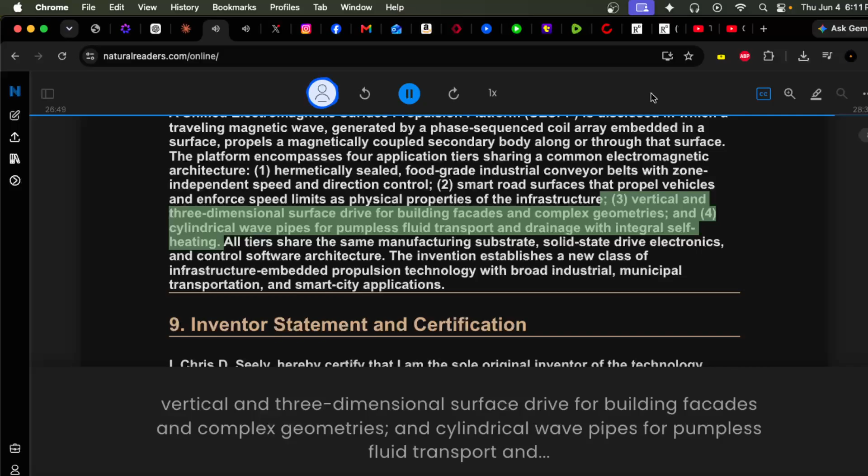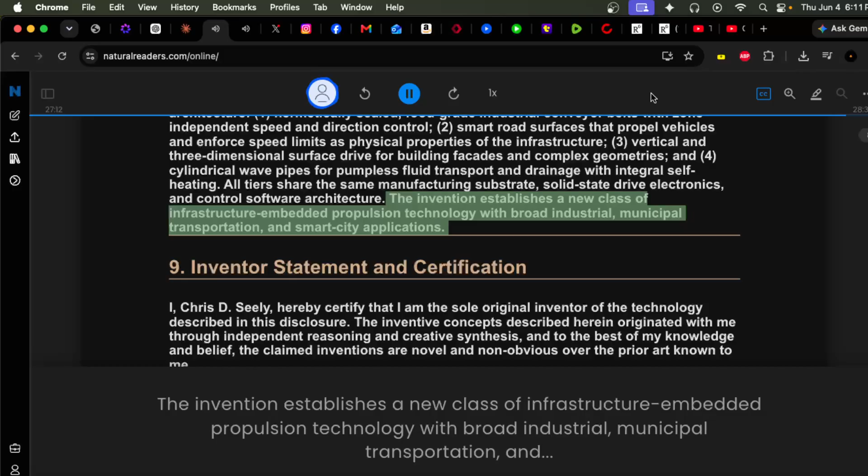Vertical and 3-dimensional surface drive for building facades and complex geometries, and cylindrical wave pipes for pumpless fluid transport and drainage with integral self-heating. All tiers share the same manufacturing substrate, solid-state drive electronics, and control software architecture. The invention establishes a new class of infrastructure-embedded propulsion technology with broad industrial, municipal transportation, and smart city applications.

9. Inventor Statement and Certification. I, Chris D. Seely, hereby certify that I am the sole original inventor of the technology described in this disclosure. The inventive concepts described herein originated with me through independent reasoning and creative synthesis, and to the best of my knowledge and belief, the claimed inventions are novel and non-obvious over the prior art known to me.

This document is filed as a provisional disclosure to establish a priority date. It is my intention to pursue formal patent protection for the inventions described herein. All rights are reserved. Date: June 4, 2026.